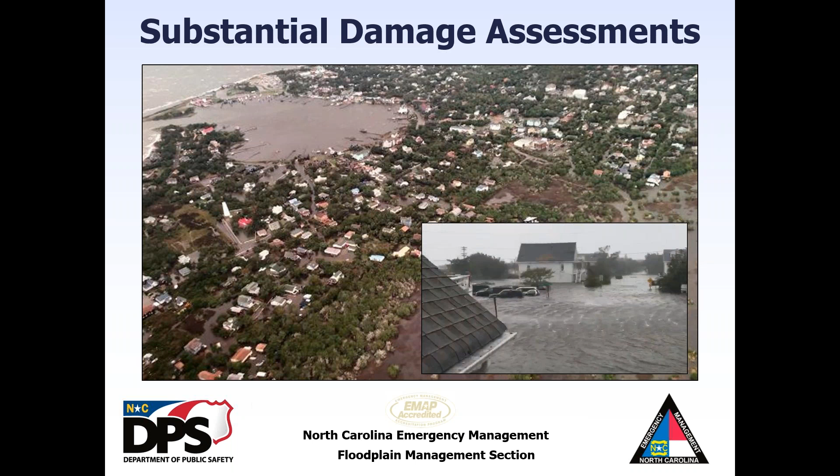So just to start off, these events are surprising people more and more. They're coming more frequently, and I think that we all should just remember to be as prepared as we possibly can and don't underestimate Mother Nature. So this picture is of a home that was elevated before Florence hit, and it was elevated several feet above the BFE of the maps. And as you can see here, there's a garage or storage shed that is floating.

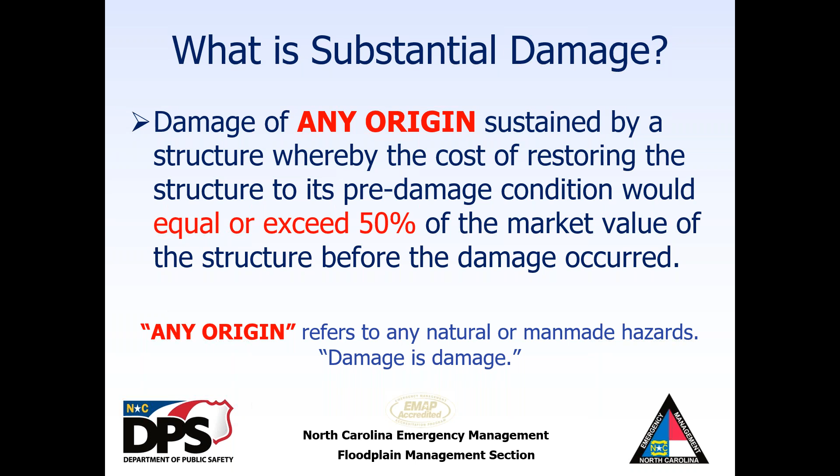So what is substantial damage? Well, it is damage of any origin sustained by the structure, whereby the cost of restoring the structure to its pre-damage condition would equal or exceed 50% of the market value of the structure before the damage occurred. And restoring the structure to its pre-damage condition is important. Any origin refers to natural or man-made hazards. They say damage is damage, so we would consider all damages in this assessment.

And most times the primary cause of our damage here in Eastern North Carolina is flooding or flooding and high winds. The SDE inspectors need to evaluate the impact of all damages. That would be including fire, tornado, even lack of maintenance, fallen trees, and even damages that occurred prior to the most recent event. So if you had an event in January that caused damage, and then we're inspecting this structure in September, it's within that 1 year look back period. So we're going to consider damage from that event as well that happened in January.

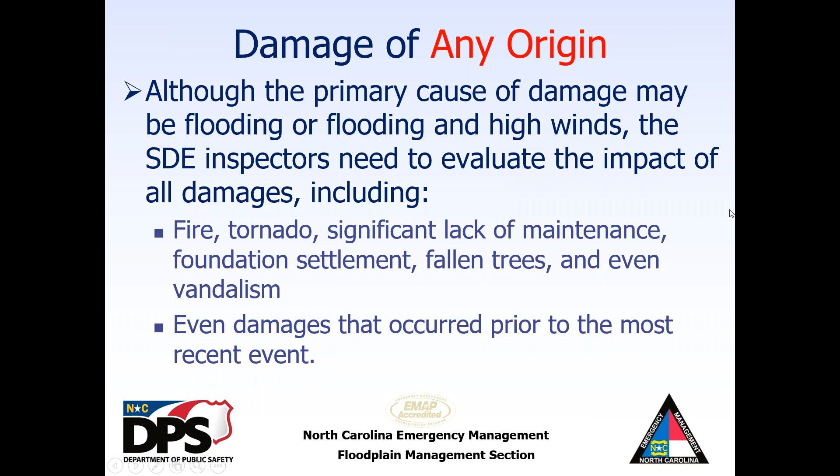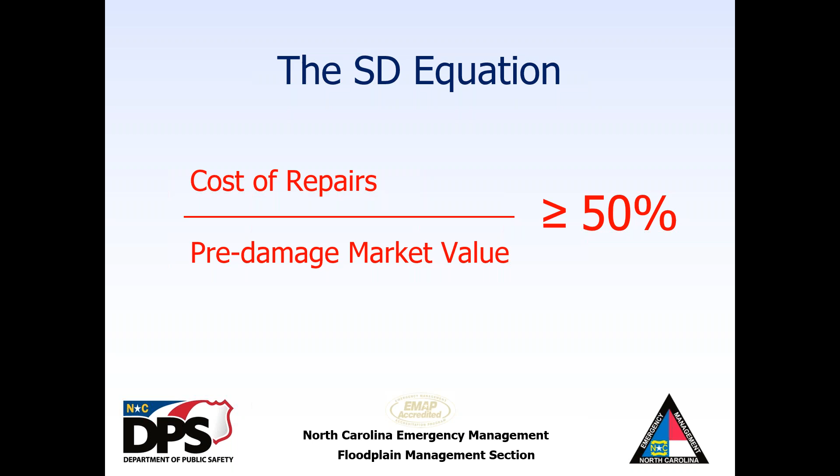There is an SDE equation or an SD equation. The cost of repairs is going to be divided by the pre-damage market value. And if that is equal to or greater than 50% of that market value, it is considered substantially damaged and would need to be brought into compliance with today's flood damage prevention ordinances, base flood elevations, things of that nature.

So the cost of repairs are based on the percent damage of individual elements within a structure. We're going to cover those individual elements later on, so I'll let that go for now. And then pre-damage market value refers to the value of the structure the day before the damage occurred. And when we talk about structure value, this does not include the value of the land, the contents, personal belongings, or detached structures. This is just the structure in question.

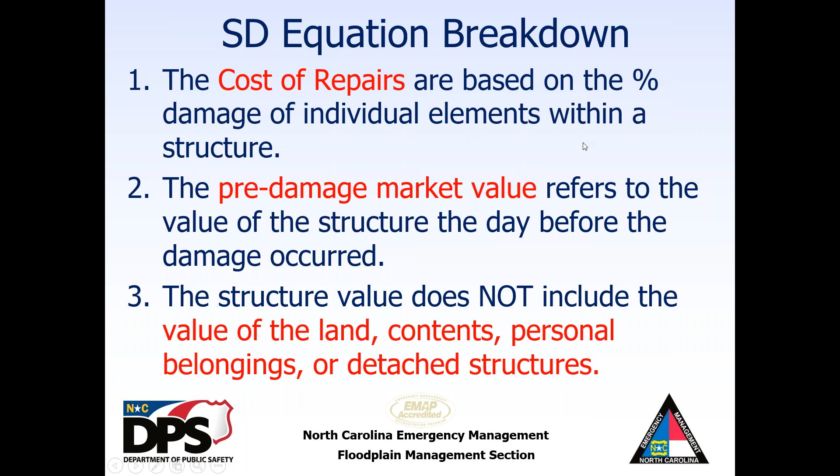So when the rain stops, we are going to jump to action, and we are going to start contacting our communities. At least this is the state. The state is going to start contacting our communities, and we're going to see who needs assistance with these damage assessments. Some of these communities don't have the resources or the staff to conduct a multi-day inspection through their special flood hazard areas, because they're going to have a ton of other things going on.

So what kind of data do we need? We definitely need a list of structures that are located in the special flood hazard area, and the ones that are going to need to be inspected during our damage assessments. Now, the local community most likely will have done a windshield tour of the area just to see which structures were inundated, had damage, and probably require a further inspection or closer inspection. So we'll get that list of structures.

We will have the priority areas identified, and we will have address data and maps made from our tax records. So GIS and tax record data is super helpful and very important when putting together all of this data. So our staff will have close contact with the tax personnel of that community, whether it's the county or local government.

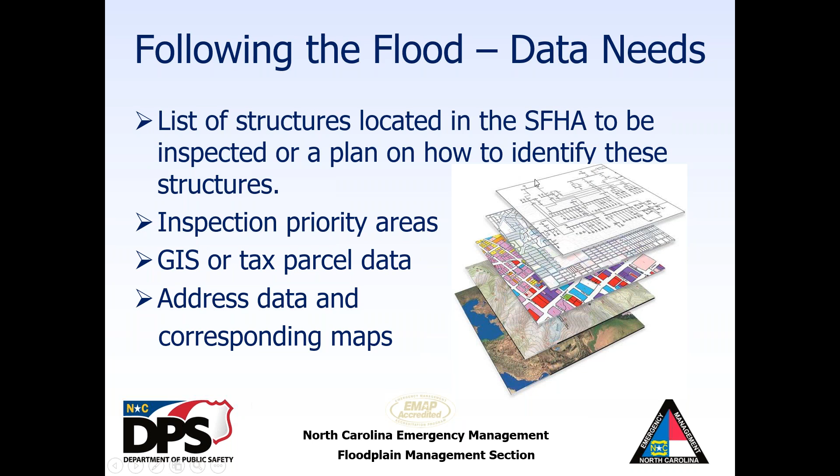So we will also need to obtain base or unit cost for the single family homes, mobile homes, and non-residential structures. This is typically going to be kind of like a replacement cost. So we're going to say that the general cost for the area is about $120 per square foot to build back in today's standards. Also, market value of the structures, adjusted tax value or appraisal data will be needed. Due to the availability of the tax value, we use that right out of the gate. And then we can come back and try to get some market values or appraisal data from property owners.

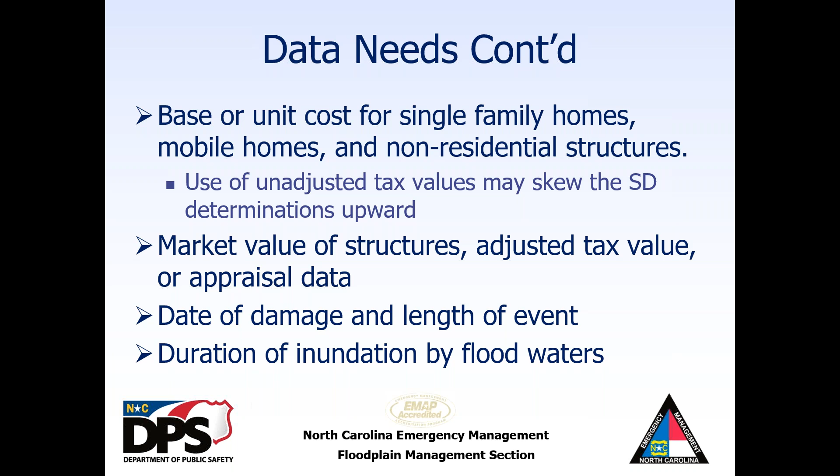We also will need the date of damage and the length of the event. It is very important to consider the duration that the floodwaters were in each of these structures, because it will make a difference as far as saturation and wicking and all those interesting things.

So cost of repairs, there are 3 options that the NFIP allows. The one that I have used for our last 2 assessments is the computed damages from the SDE tool. The tool was developed to do this. It incorporates all of the necessary factors to determine appropriate percentage damage. So this is what we use.

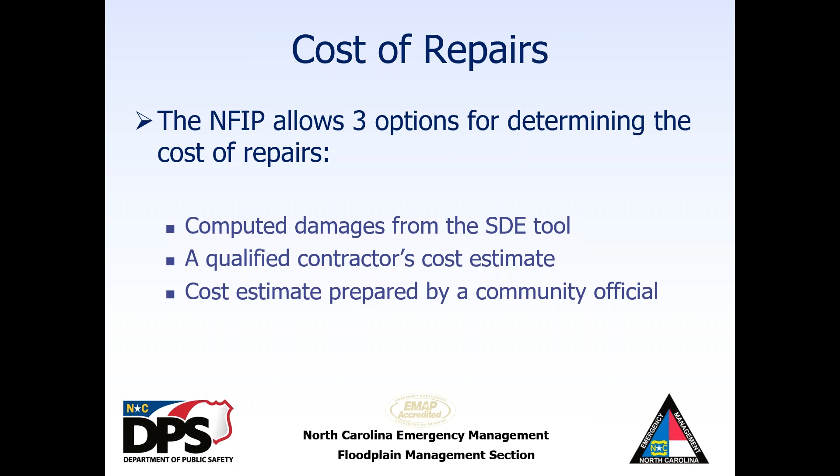You can also get a qualified contractor's cost estimate. And generally, when those come available is after the community has performed damage assessment and provided the homeowners with a letter stating they are considered substantially damaged or not. And so then the property owner can kind of appeal that determination by presenting a qualified contractor's cost estimate or an appraisal of their structure. Also, a cost estimate can be prepared by a community official. If they have a community official on staff that is qualified to prepare this cost estimate, it can be done in-house by the local governments.

So things to remember when accepting contractor or community official cost estimates. Local communities need to make sure that all repairs necessary to return the structure to the pre-damage condition are considered. And that includes donated materials and volunteer labor. Those need to be calculated at prevailing market values, just so it is an apples to apples approach for each structure.

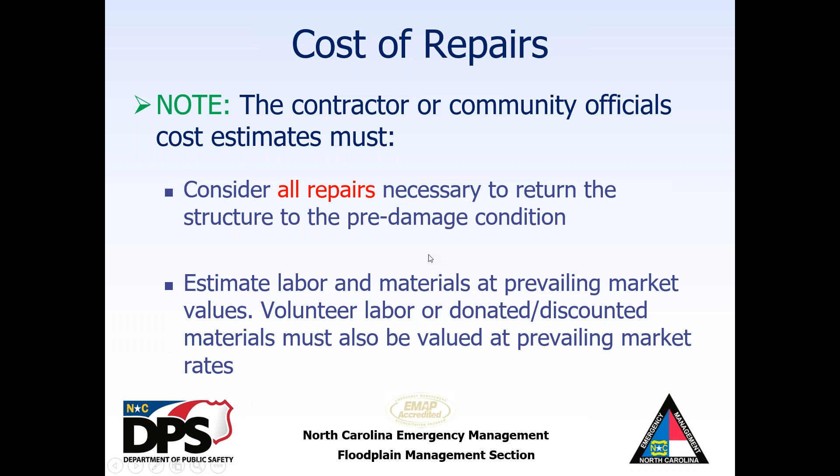When a community or the state is looking into a prepared damage assessment or cost assessment for the repairs to the structure, we are going to need to look at all structural elements. And those elements are going to include foundation, footings and pilings, monolithic or other types of concrete slabs, bearing walls, tie beams and trusses, wood or reinforced concrete decking or roofing, floors and ceilings, attached decks and porches. That's important. They must be attached to that structure.

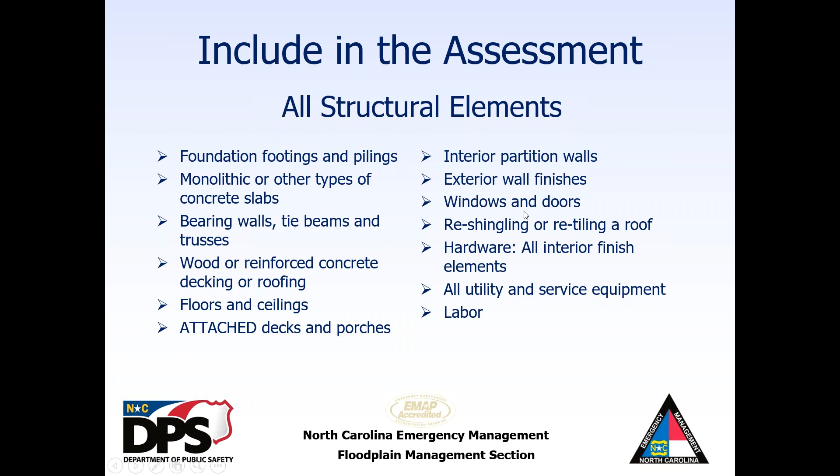Interior partition walls, exterior wall finishes, windows, doors, shingles, and then hardware for all interior finish elements, utility and service equipment, and the labor to repair those things. In addition, it will be all interior finish elements. So that's going to be your flooring, tile, hardwood, carpet, and this is going to be the stuff that's immediately above the subflooring. Bathroom tile and fixtures, wall finishes, kitchen, utility and bathroom cabinets, built-in bookcases, cabinets, and furniture and hardware.

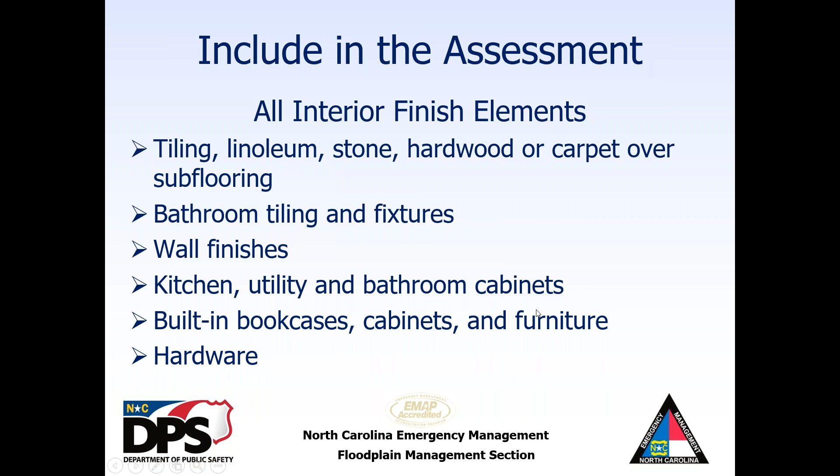Also, utility and service equipment: heating and cooling, repair or reconstruction of plumbing and electrical services, all of your light fixtures and ceiling fans and security systems. And then appliances are going to be the built-in kitchen appliances, so stoves, ovens, and dishwashers. Even things like central vacuum systems, water filtration, conditioning, or recirculating systems, and electrical panel boxes.

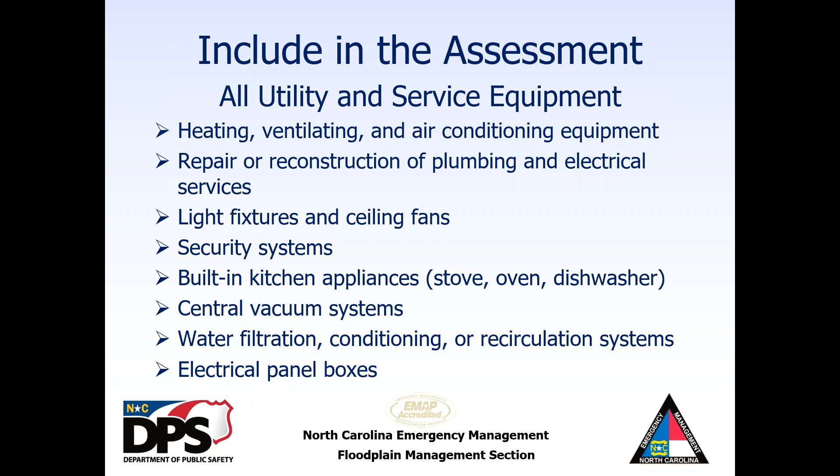Some of these things are going to be hard to determine whether they're existing or not. So this is why when those contractors are preparing these estimates, we list out these requirements in their estimates. Things that we do not want in those assessments are clearly listed out here as well. So we don't want to include the cleanup and trash removal. You'll see in a couple pictures later on that there is a ton of debris outside, appliances, countertops, and we don't want that included in these assessments.

Cost to temporarily stabilize a building will not be included. Any plans or specifications needed to rebuild, land survey costs, permit fees and inspection fees will not be included. But a lot of times the local communities will waive these fees anyway, so that's kind of a good thing to note. Carpeting and recarpeting installed over finished flooring. So if there's a wood floor over the subfloor and then they're going to put carpet over the top of that, they're not going to include that second layer of flooring.

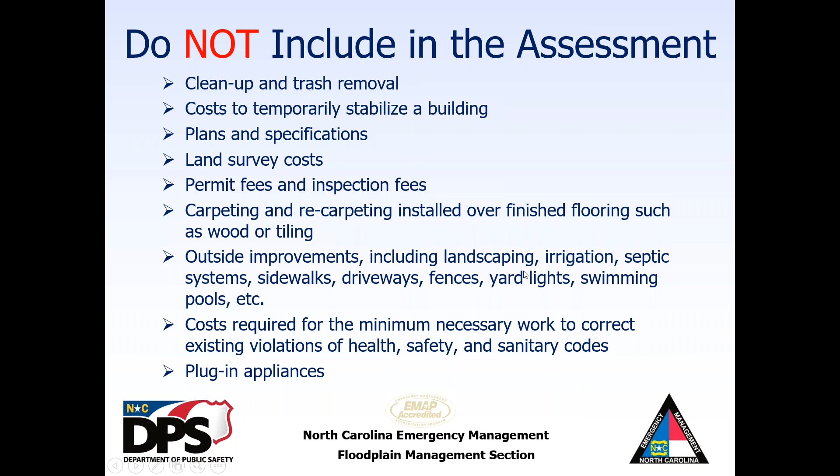Any outside improvements and cost required to repair existing violations of health, safety, and sanitary codes. This would be an existing, identified, and required repair. So if they've already received a letter stating that their sanitary situation doesn't meet the code, that's not going to be included in this assessment. And then any plug-in appliances, you're going to look at refrigerators and microwaves, things like that.

So the inspections themselves, this is where you guys are going to come in if you decided to volunteer. We want two-person inspection teams. It's strongly recommended, and it's recommended for good reason. It helps with safety issues and the completeness of the inspection data. One person might get involved in something and forget to fill something out or take a picture. So two people on the inspection team is really helpful for the quality of inspection data, and also the speed of inspections. Sometimes you're going to have distractions.

You're going to have neighbors walking over asking what you're doing, and the property owner might be there wanting to talk and discuss cleanup and what the next steps are, and actually what that substantial damage determination means for them. So it's good to have one person take lead on that conversation and let the other person do the inspections themselves.

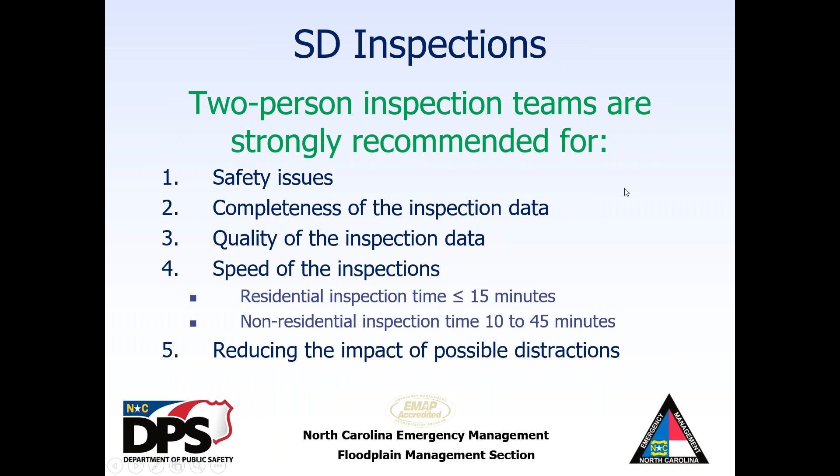It's super important that the inspections will be completed as is. We do not want any inspectors to go in and start removing drywall or carpeting, or pulling up flooring to get a better look at the subfloor. We don't want you climbing ladders or getting into attics or going under the homes. We're going to take a walk around the house, look in some windows. If the property owner allows you to go inside the house and it's safe, you can go inside and take a better look. But from what I've seen, not a lot of property owners have been allowed back into these damaged areas until after a couple weeks, for getting electricity back on and things like that.

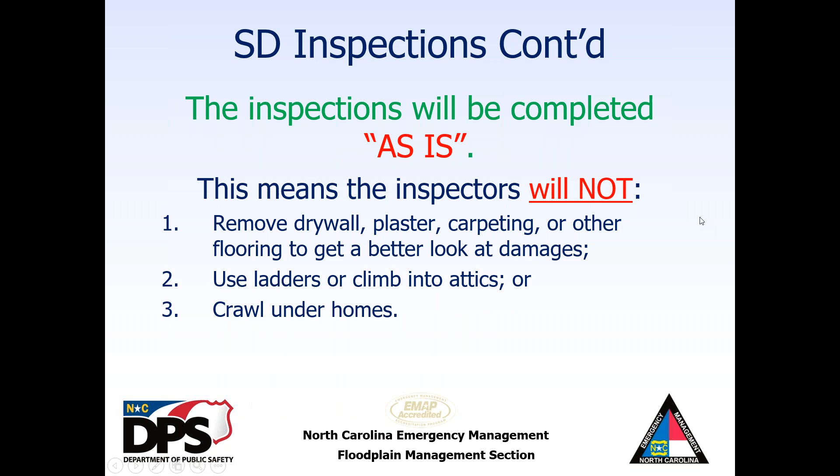There are 3 parts to the inspections that require judgment. They make you use your brain to formulate some ideas as to what the original quality of construction is. Was this a low-end home? Was it a budget home? Was it an average neighborhood? Or is this a high-end neighborhood with high-quality fixtures and construction? For the most part, we are going to say, let's use the average quality of construction unless it is clearly a lower end home or a very high-end home.

And this is the same for the pre-damage depreciation value. We're going to say, let's use average condition for the majority of them, but if it has clearly had some deferred maintenance and is in very poor condition, then we would say, okay, go ahead and check that on the worksheet. And on the other end of the spectrum, if it is a brand new home and it's in excellent condition, then we would go ahead and mark that on the worksheet.

And here's the one that I think takes the most consideration: the building element percent damaged. This takes a little bit of thinking and figuring out. Is it a 2-story home where 50% of the floors are damaged, or is it a 1-story home where 100% of the floors may be damaged? And just a quick note, we do ask that these be in increments of 5 or 10, just for the ease of computing.

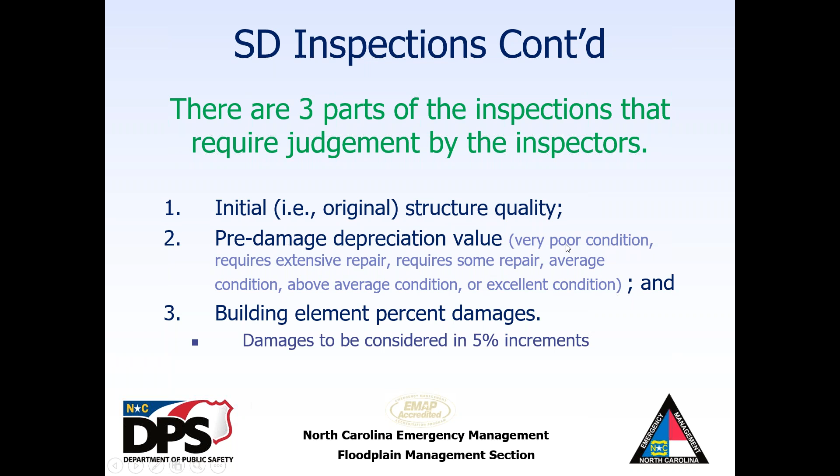So we do want to have some sort of a layer of ethics when we walk out into the field. We don't want to get in the way of any of the recovery efforts from emergency management, or maybe the fire department, or even the local government. And we also want to be very respectful and careful when we are doing these inspections.

Always ask permission before you enter into a house. Knock on the door if you suspect somebody's home before you go walking around the house. And then obviously don't enter a structure if it is unsafe or potentially has unsafe conditions.

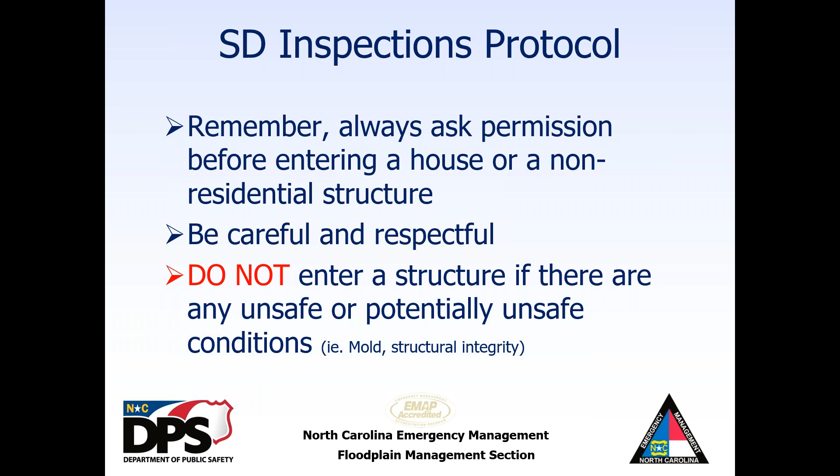So now we'll talk about assessment types. There are 2 types of assessments. Used to be 3, but they've kind of consolidated. So we have the residential type of assessment, and this is for single family homes, town homes, or row homes. And then we have the non-residential assessment for everything else, which also includes apartment buildings.

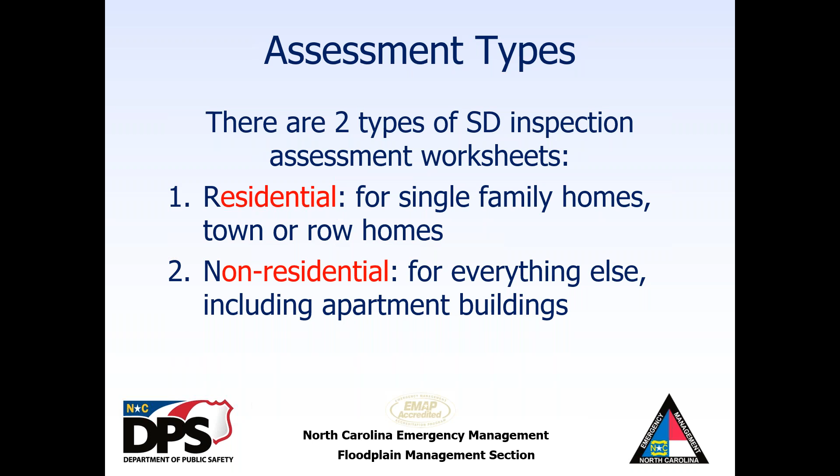So this is an example of the worksheet that we have taken out into the field. This is the residential worksheet. I'm just going to quickly go over the components. A couple of things that we really want to capture: we're probably going to be divided up into teams, so we're going to want your team name or number. We're going to want the date. And this is a situation where, if we're running through these, we know the date, but we need to know the team name.

We need to know the street address, and make sure you put east or west, north or south, and just kind of clarify where that's at. And then we want to know the structure attributes. One of those is: is this a single family home? Is it a townhome, or is it a manufactured home? These all make a difference in the calculations of the percent damage under the element percentages. Is it 1 story or 2 story? Like I was explaining a little earlier, it makes a big difference in the percent damage of the elements if it's a 1 story versus a 2 story or 3 story.

Foundation types, and then we look at what type of superstructure we have. Is it wood framed? Is it masonry? Roof coverings, exterior finishes, HVAC system. What type? Does it have a heating and cooling system? Is it central air, HVAC? And then, like I was talking about, quality. Is this average construction, or is it something that is on the farther edges? The depreciation rating up here in the right-hand corner is also going to be generally average condition unless we can really prove that it's poor or excellent.

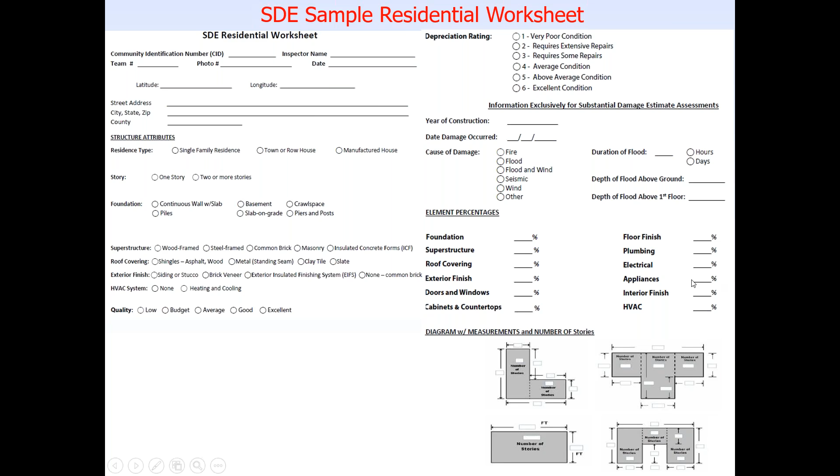Here is a non-residential worksheet. It is a little bit different than the residential. They're going to ask for different things. They add 5 or more stories, 2 through 4 stories. So that's a little bit different. And then they add the structure use.

And when you go into the deep training on the SDE process, they will clarify how important the use is and how it calculates percent damages based on the use of that structure. So we want to get those as close as possible. You may not see the exact use in here, but put it as close to one of those as possible.

Sprinkler systems or an elevator or escalator, you might be able to see whether that is included in the structure or not. You may not, so that's something that we can always go back and get information on. And then about the same quality, date, type of damage, hours of inundation.

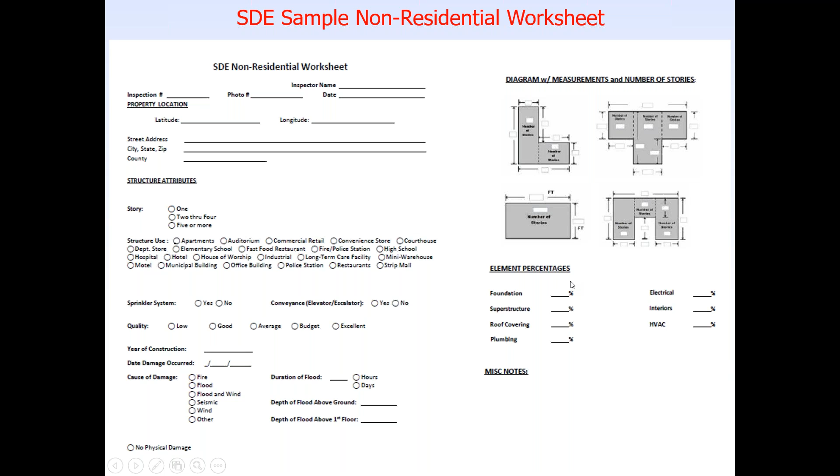And then over here under element percentages, there is a little bit less to calculate at first glance, but they've lumped a whole bunch of different categories that we had to look at in residential into the interiors over here. So that's why that's different. And we'll go into that deeper later on.

So sometimes we will come across businesses that are located in residential structures. So the inspection form should be based on the design and construction materials and initial use of the structure. So with one of those worksheets that I just went through, you need to figure out what the initial use was, not the exterior appearance or the current structure use. And then if you're in doubt, consider whether someone could actually live long-term in a structure that you're looking at.

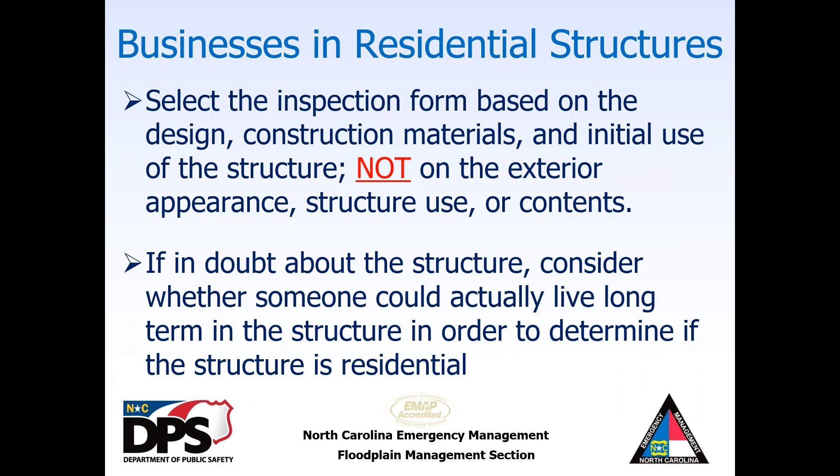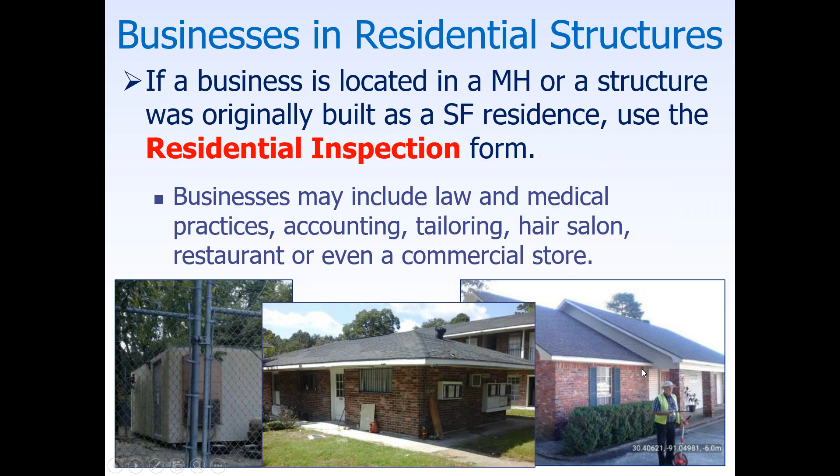So the entire rest of the section is going to be about estimating percent damages. So we'll move into that. Things to note is elevation of the lowest floor. A lot of times it's going to be at that first door threshold. This is not going to be notated on your worksheet that you'll have out in the field. However, it will be something that we'll look at when we're doing our assessments to see where the floodwaters lie. And we may be able to pull this information from other data sources or from elevation certificates located in the local office. So we may have this information.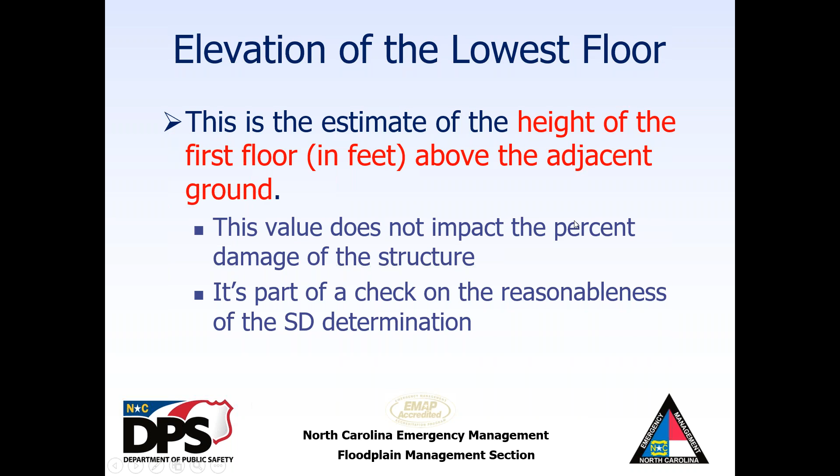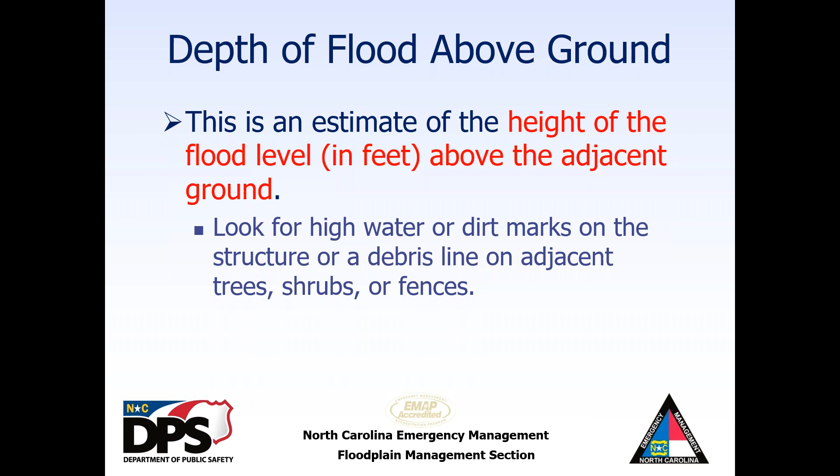Depth of flood above the ground, this is super important. You'll always want to notate that on your worksheet. And in order to do that, you'll look for a high water mark or a dirt mark on a structure or debris line on adjacent trees and fences, shrubs. A lot of times the house looks clear and then you walk into like an outdoor shower or around the structure, and you'll see those wrack lines or watermarks. So you'll be able to get an idea of how high that water is.

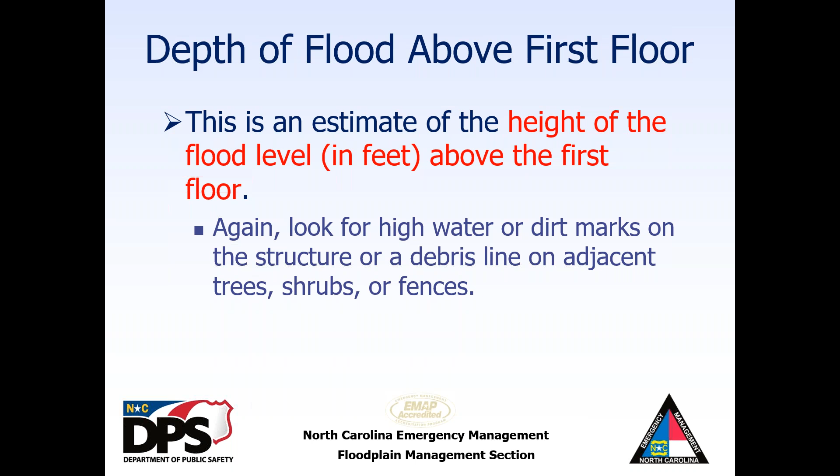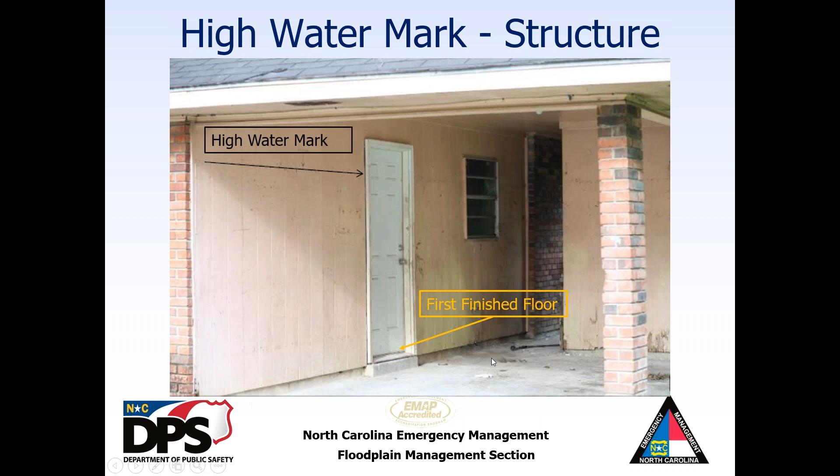When we are either driving in our cars, going to the next structure, or we're walking down the neighborhood because they were all flooded, you may have homes that look like this. Don't let that fool you. It may not look like it's been damaged, but then you walk inside and it may look a little something like this, and the homeowners have already been ripping out everything. So just be aware that taking a closer look is going to be required when you're doing these assessments.

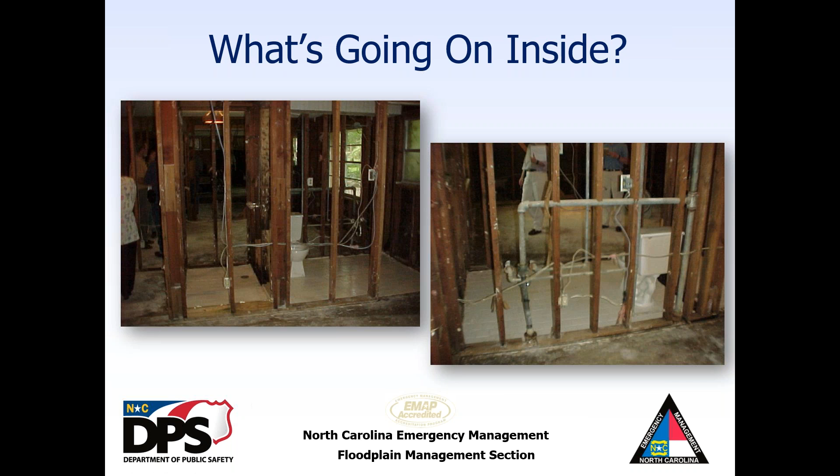So for some resources, what is the baseline for estimating damage to each of these elements? There are, thankfully, good resources that you will probably have in the field with you, and they give you a good idea of what a baseline for percent damage is on each of these things.

And this is a picture of one of the structures that we took a look at on Oak Island this past week. This is the back of the house, and from the front of the house, you could kind of see a little bit of tarp coming over the ridge line of the house. And so we walked around to the back of the house, and you could see that there was a lot of damage to the roof that wasn't necessarily apparent from the front.

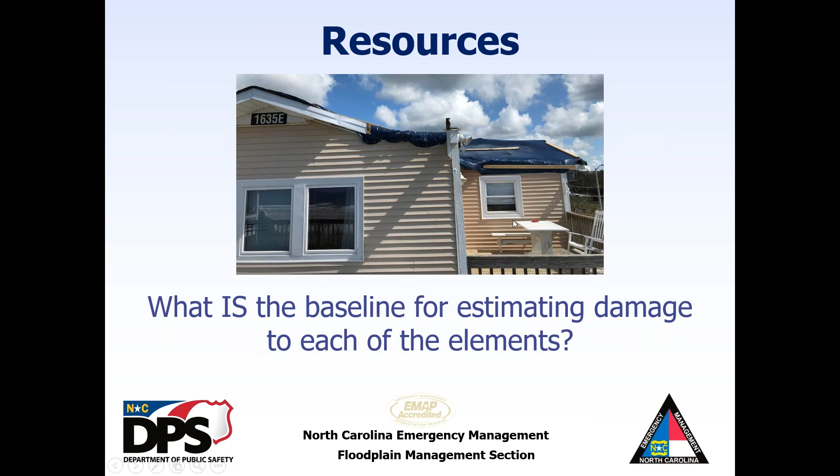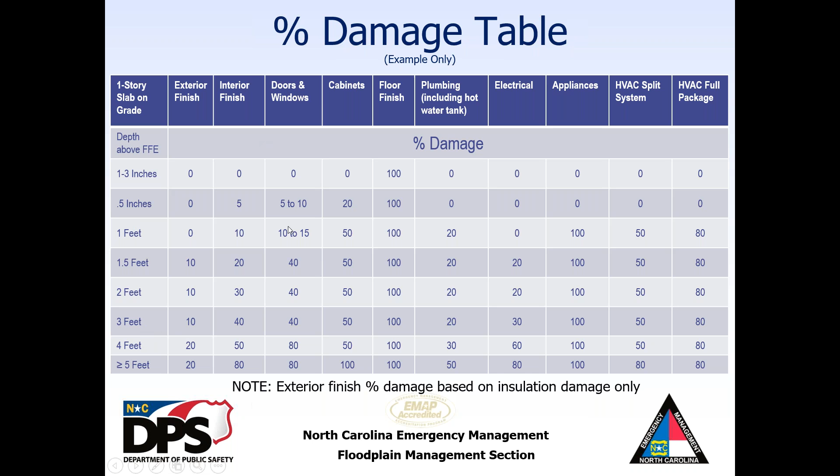This here is a percent damage table. This is a little bit different from the next resource that I'm going to show you, but it gives you a good idea of what kind of percent damage for each element may be present with the different amount of feet over here on the left-hand side. And these are going to be based on a one-story slab-on-grade home.

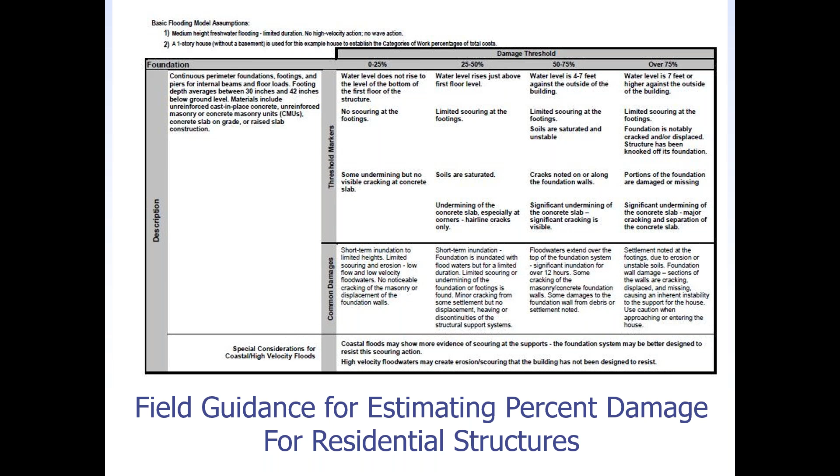This is the field guidance for estimating percent damage for residential structures. This is what we take out in the field. It's probably 12 pages. And this is just an example of the foundation. It gives you kind of a description, and then it gives you percent damage based on the level of flooding. And this is just kind of a closer up of what it's talking about.

A 0 to 25% damage is going to be if water does not rise to the level of the bottom of the first floor. There would be no scouring at the footings, and there may be some undermining of the concrete slab, but really no visible cracks that are new. 25 to 50% damage would be if the water rises just above the level of the first floor, and there's going to be some limited scouring at the footings or the pilings, and the soils are going to be saturated, and you're going to see some undermining of the concrete slab and maybe some cracks.

50 to 75% damage would be 4 to 7 feet outside of the building. Again, some scouring, and then cracks are going to be notable on foundation walls potentially, and the undermining of the slab. 75 to 100% damage could be anywhere from 7 feet or more above the first floor or outside of the building. Scouring, foundation is cracking or displaced. The structure has been knocked off its foundation, and then portions of the foundation are damaged or missing. Undermining of the slab, major cracking and separation of the slab.

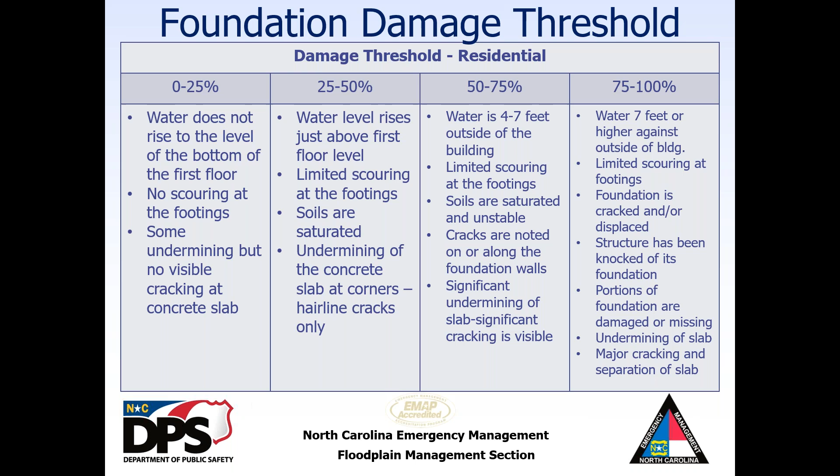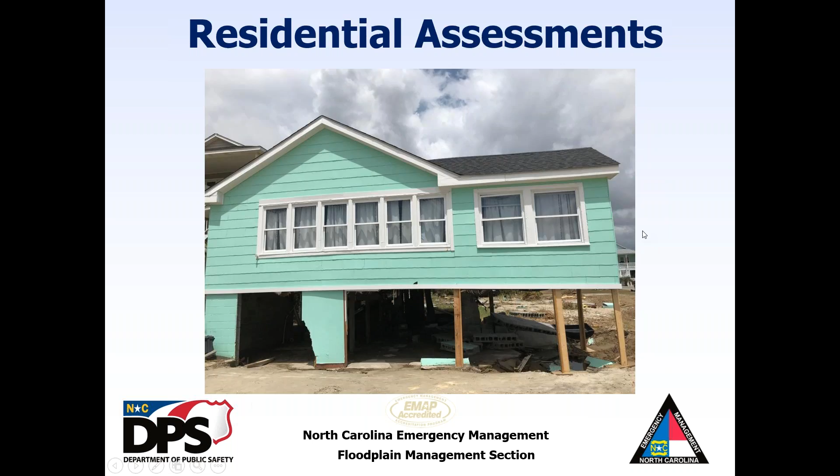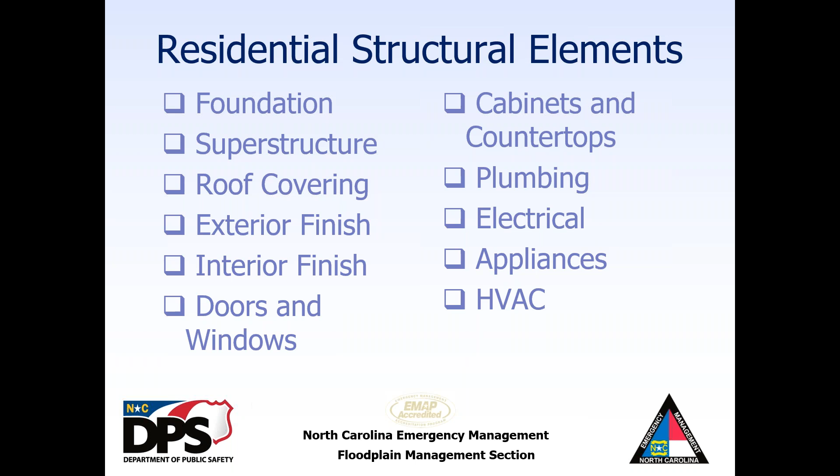So residential structural elements, we kind of went over this earlier. You are going to look at the foundation, the superstructure, roof covering, exterior finish, interior finish, doors and windows, cabinets and countertops, plumbing, electrical, appliances, and HVAC. And then we'll go into what each of those elements include.

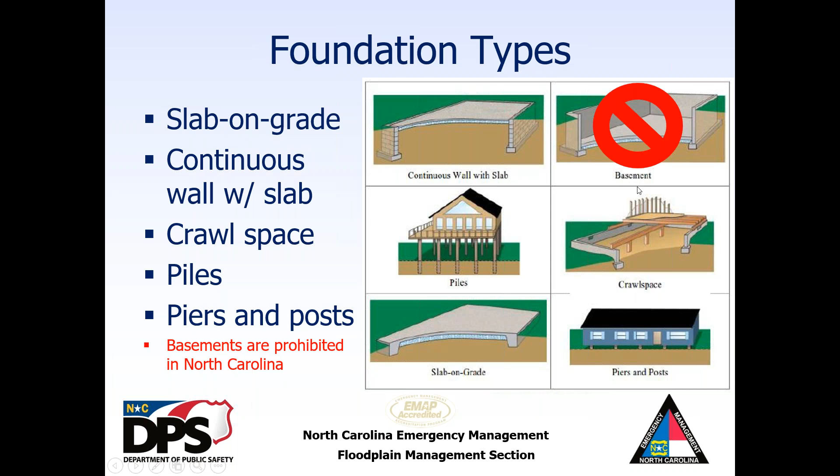So we will also look at the superstructure, and this will include the wall support systems that extend from the foundation wall to the roof structure. It could be exterior wall sheathing panels, shear panels, braced wall panels, and structure members that support the roof, so the rafters and the trusses, but this does not include roof sheathing. That would be included in the roofing.

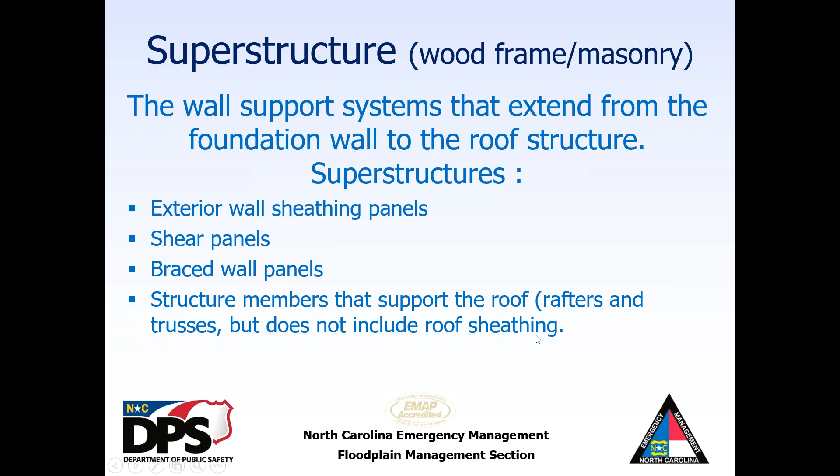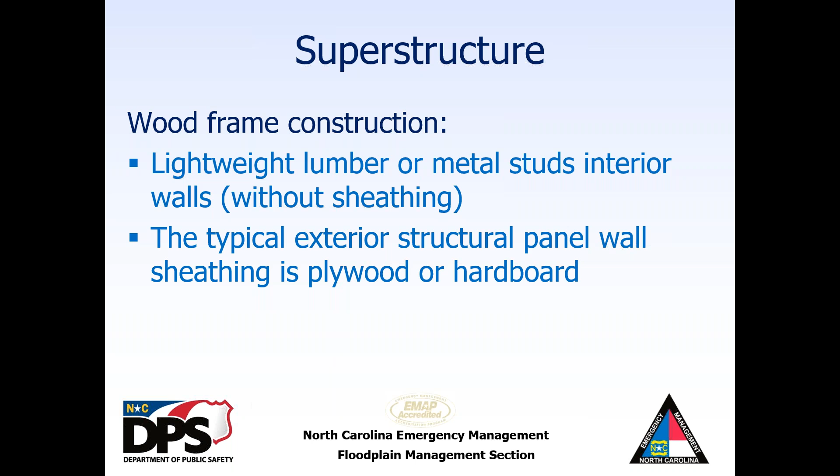So if you have a wood frame construction, it's going to be lightweight lumber or metal studs, interior walls without sheathing, or the typical exterior structural panel wall sheathing is plywood or hardboard. It's typically what you'll see.

Masonry construction, you're going to have load-bearing walls using unreinforced masonry and reinforced block or brick. Typical exterior covers of the masonry are going to be stucco, siding, and masonry veneer. And then you may see some reinforced concrete construction, and this should be categorized under masonry in the superstructure.

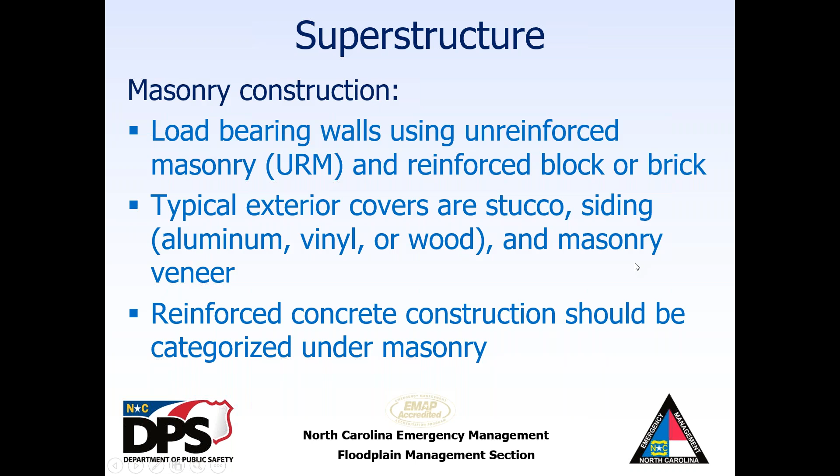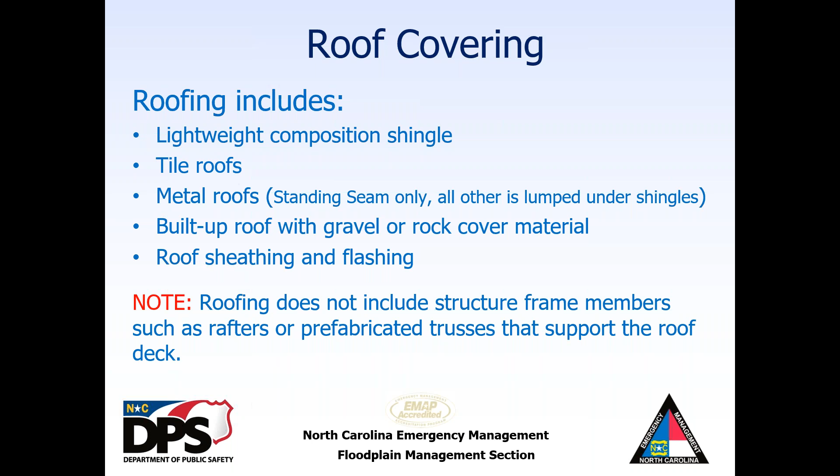Roofing is going to include lightweight composition shingles, roof tiles, metal roofs, and we were told that this should include standing seam only. All other regular metal roofs would be lumped under shingles just because of their cost value, I believe. And then built up roofs with gravel or rock cover, and then it will also include the roof sheathing and flashing. Something important to note is roofing does not include the structure frame members, such as the rafters or prefabricated trusses.

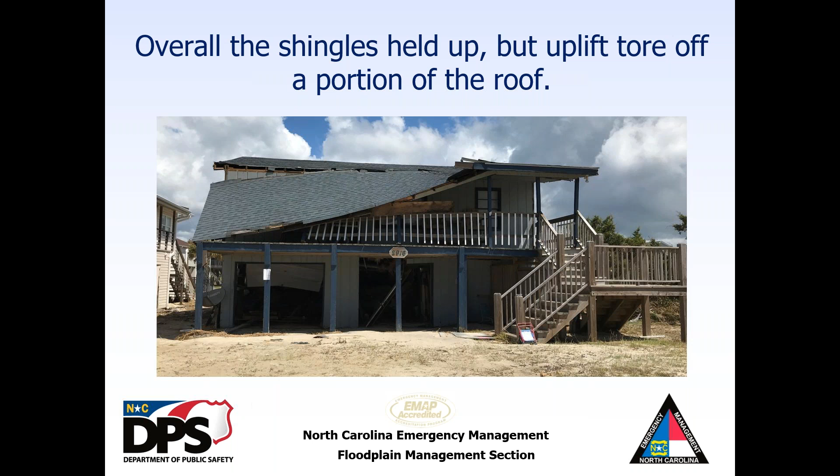So here's another picture of a structure from Oak Island. It looked like the overall shingles held up, but we believe the uplift from the wind tore off a portion of this roof. It was a little difficult to see what interior damage there was, but we did see that obviously there's some roof damage.

Exterior finish. This will include the wall covering system that covers the wall, sheathing, as well as insulation and weather stripping. So water resistant materials and finished materials such as stucco, siding, stone veneer, and masonry veneer. Insulation installed at the flooring beneath the lowest floor and throughout the walls and ceilings, that will be included. And then you'll see multiple types of insulation: fiberglass, blown wall and ceiling insulation, rigid insulation, things like that.

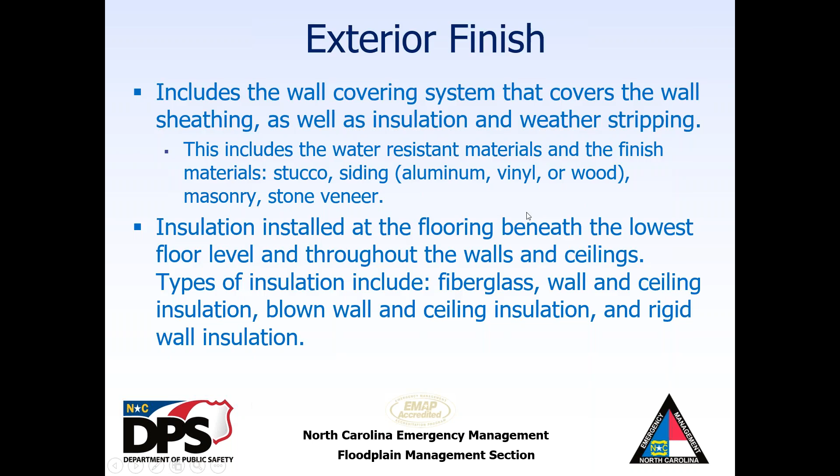Interior finish, this one is a little bit interesting. So interior finish includes the gypsum board, drywall, plaster, paneling, trim, and door baseboards, casing, chair rails, and ceiling moldings, all make sense. Materials include the low-grade wood, plastic, composite, softwoods, and hardwoods.

And then finishes include paint, stain, or varnish, and this item would also include exterior and interior painted surfaces. So when they break down these exterior painted surfaces, it is just trim work, and it's just the paint. It's not going to be the cost to repair the trim itself or the stucco or brick. It's just whatever's painted.

So doors and windows, obviously it includes doors and windows, and will also include locks, hinges, frames, and door handles. And there's going to be a couple assumptions made for the quality of construction. If you pick the average quality of construction, they're going to consider hollow core doors with low cost hardware. And this is for low, fair, and average construction.

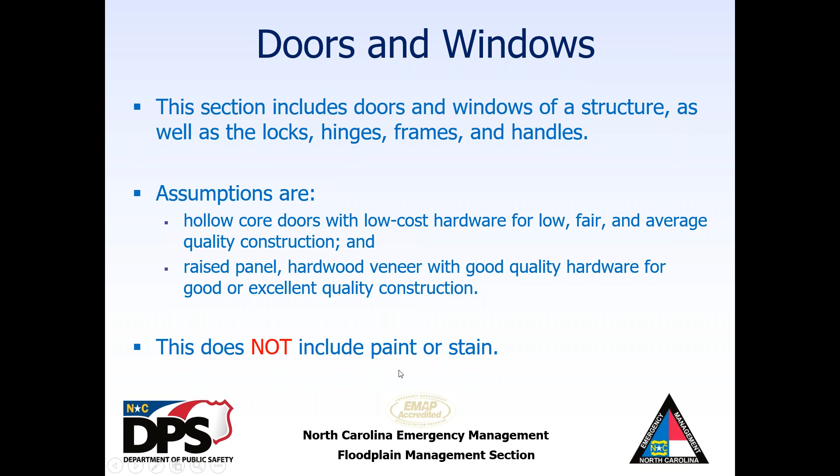And then if you choose good or excellent quality, they're going to look at replacement for raised panel hardwood veneer doors, which does not include the paint or stain. As we just said, that's going to be included in your interior finish.

Cabinets and countertops. The basic cabinets for bathroom vanities and kitchens will include the paint grade cabinets, and those will be made of fiberboard or plywood. Paint grade cabinets are the baseline because they can be painted to match the upper wall cabinets when they're repairable and to return the house to pre-disaster conditions.

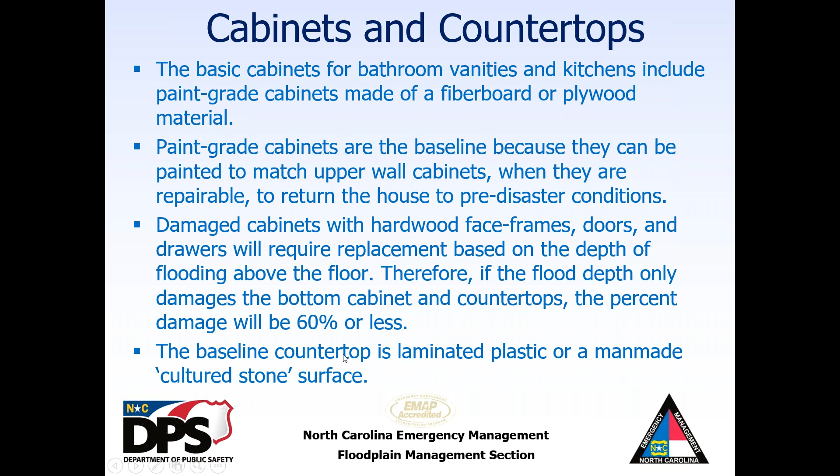Damage to cabinets with hardwood face frames, doors, and drawers will require replacement based on the depth of flooding above the floor. So if the flood depth only damages the bottom cabinet and countertops, the percent damage will be 60% or less. Generally, we call it 50% unless we get countertops in there as well. And the baseline countertop is going to be laminated plastic or man-made cultured stone used for rebuilding purposes or calculation of percent damage.

Floor finishes, as we talked about earlier, would be the carpet, hardwood, vinyl, ceramic tile. This is going to include subflooring and floor sheathing. Typically, all those carpeting, hardwood flooring, vinyl tiles, and sheet vinyl are going to be replaced after water inundation. So if you see that, you're going to 100% damage that element out. Brick, stone, and clay tile most generally can be cleaned and sanitized and reused. So you would put less damage percentage on those.

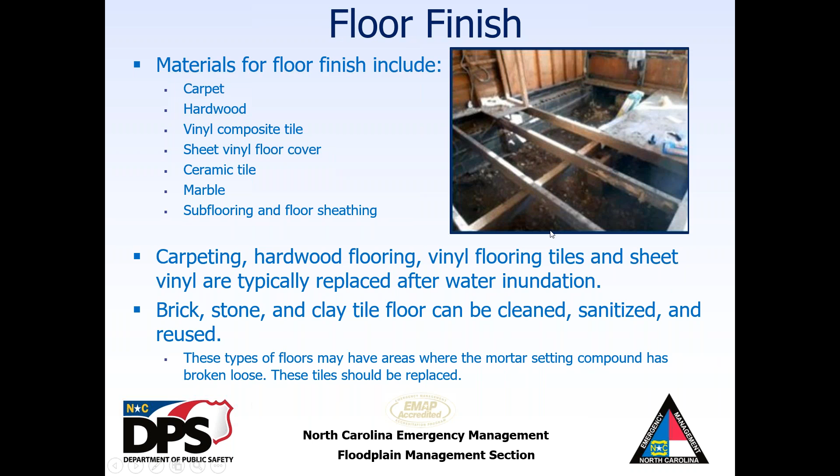Plumbing, we are looking at the incoming water services, the water heater, water distribution piping, and the wastewater system. And when floodwaters saturate soils, septic systems may be unable to discharge their waste, causing a backup of the septic systems. So this kind of helps with determining level of damage or percent of damage. And also, same thing, if water raises above municipal sewer manhole covers, sewage can back up into the house as well. So keep an eye out for that, especially if you're walking through houses and things.

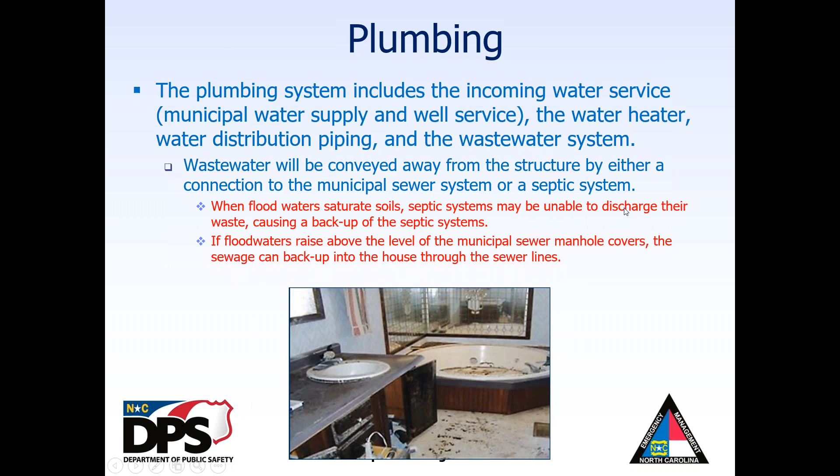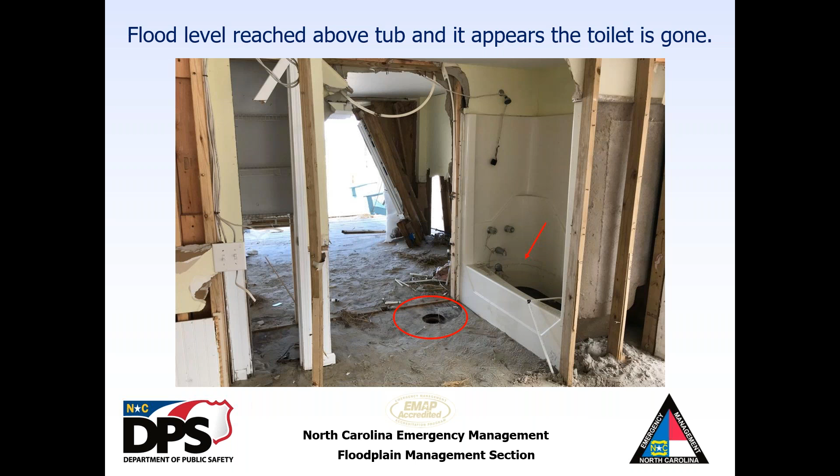On this structure, you can see that the water reached above the tub. It looks like the toilet was completely ripped away from maybe wave action. So I would assume that this would damage the plumbing maybe 50%, but this structure is a 2-story home. So then we have to consider how much did it damage the structure? Is it 50% or is it a little bit lower because there's 3 stories or 2 stories? Just something to think about.

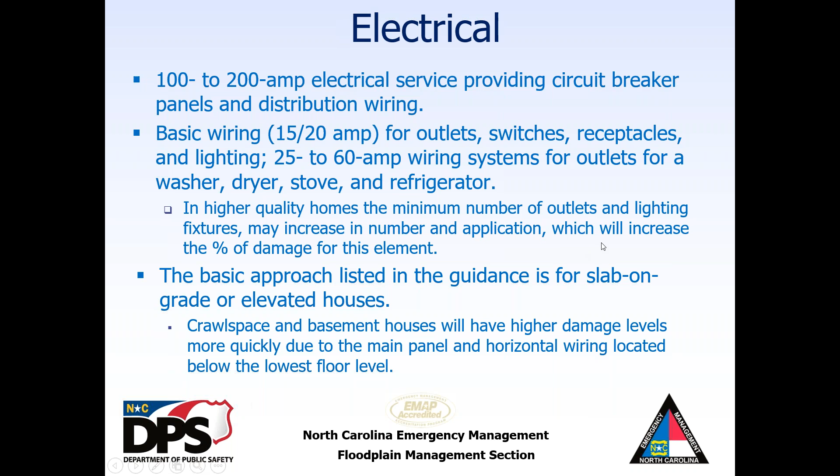Also, the basic approach listed in the guidance is for slab on grade or elevated houses. And so another thing to note with this is crawl space and basement houses will have higher damage levels more quickly due to the main panel and horizontal wiring located below the lowest floor level. You do see a lot of wiring in crawl spaces and obviously a lot of HVAC and insulation there as well.

So appliances, common built-in appliances. That's going to include dishwasher, hot water tank, and some stoves. The thing with these homes that are flooded, it's insane to me. When you walk down the street, you just see nothing but all the interior contents of these people's homes. And if you're trying to figure out what appliances got damaged, a lot of times you can just look on the street and get a good idea.

HVAC, there's a lot of different options here to consider. The basic HVAC system is a forced air heating system. The air handler system generally is located in the thermal barrier of the house. There's boiler systems, which percent damage will be less for a boiler than it would be for HVAC because the boiler system has a sealed piping system to distribute the heat, while the furnaces use the ductwork system.

Gas and oil fired furnaces are generally located in basements or crawl space, and so this will require replacement of the furnace assembly as soon as 12 inches of floodwaters are present. So that's good to keep in mind. And then it will require an adjustment of the percent damage to 75% as soon as the water reaches the firebox level of this heating equipment. So good to know the components of that type of heating system.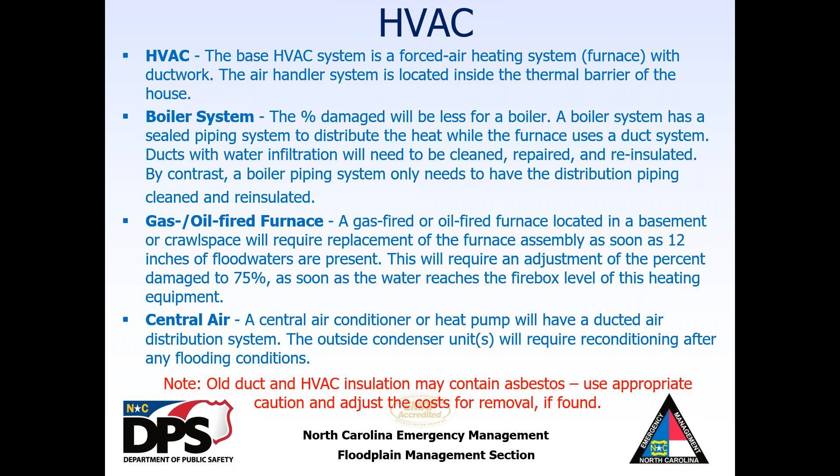And then, of course, there's the central air conditioner and heat pump, and this will have a ducted air distribution system. And then the outside condenser units will require reconditioning after any flood conditions. You see a lot of this. We saw a lot of this in Ocracoke and down in Oak Island. Just something to note, old duct and HVAC insulation may contain asbestos. So if you can identify that, or if you know about that when you're out there doing the assessments, that's something to keep in mind when you're adjusting the cost for removal.

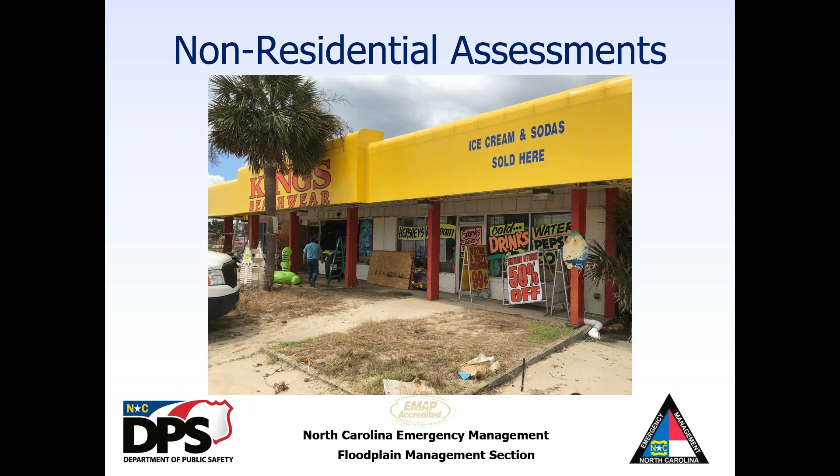All right, that gets us through residential assessments. We will go into just a couple slides on non-residential assessments because there's a small amount of difference between the two. This is a structure down in Oak Island. It had probably 1 to 2 feet of water inside the structure. But this structure was masonry foundation, so that should be helpful in their assessment.

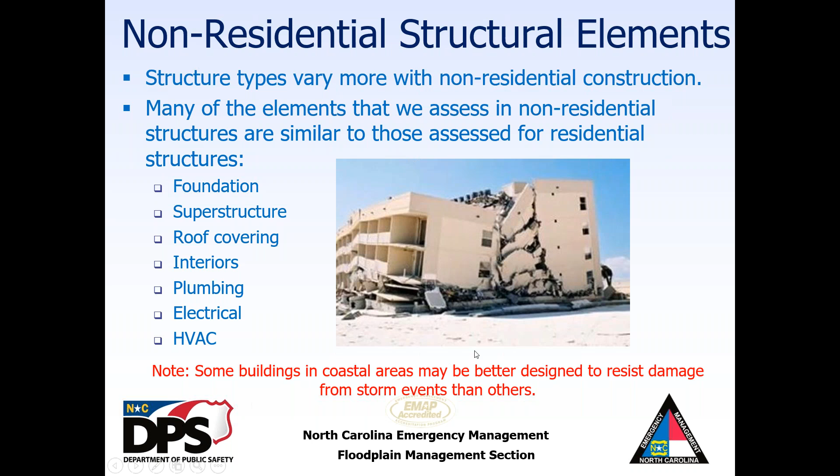It does note here that some buildings in coastal areas may be better designed to resist damage from storm events. It could be based on their construction type, their elevation, or when they were built and to what codes they were built to. So unlike residential structures, where we assess the floor finish, the cabinets and countertops and other interior elements separately, in non-residential structures, they're lumped into interior elements.

So interiors include the partitions, interior doors, surface finishes, so walls, floors, and ceilings. Materials could include low-grade wood, plastic, composites, softwoods, and hardwoods, and finishes could include paint, stain, and varnish. This will also include all interior and exterior painted surfaces, but not the building or repairs of the underlying surfaces, same as in the residential assessments.

This is noted under non-residential, but I really think that this works for residential and non-residential. Consider multiple stories. They will receive less damage to the elements than a single story structure, as the majority of the finishes may be distributed amongst the different floors or above the ground floor.